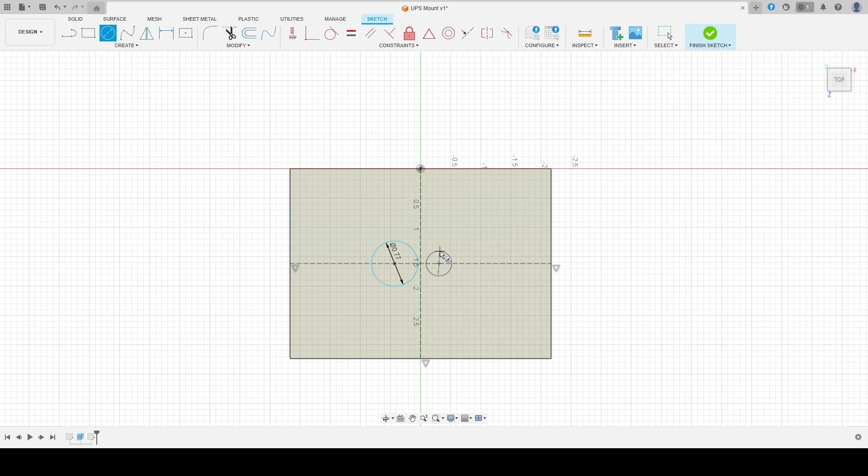So here I am in Fusion 360, starting off with a two-dimensional sketch. What I'm doing is making a 3D representation of the UPS itself, because I want the bracket as tight-fitting as possible while maintaining clearance around the electrical outlets, power button, and cords, which I'm drawing now. The cords I'm not drawing all the way complete as long as they are, I'm just making a quick representation of them.

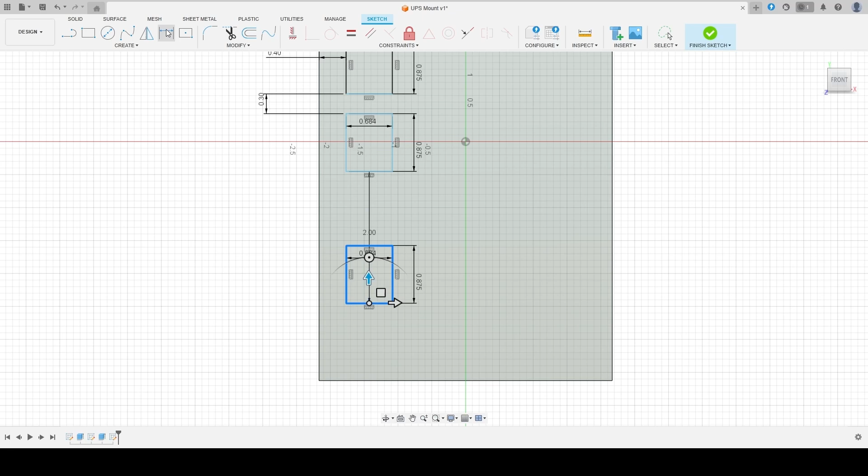Here I'm placing the power button, followed by the outlets themselves. This will make sure my design is as accurate as possible. A few extra minutes up front can go a long way.

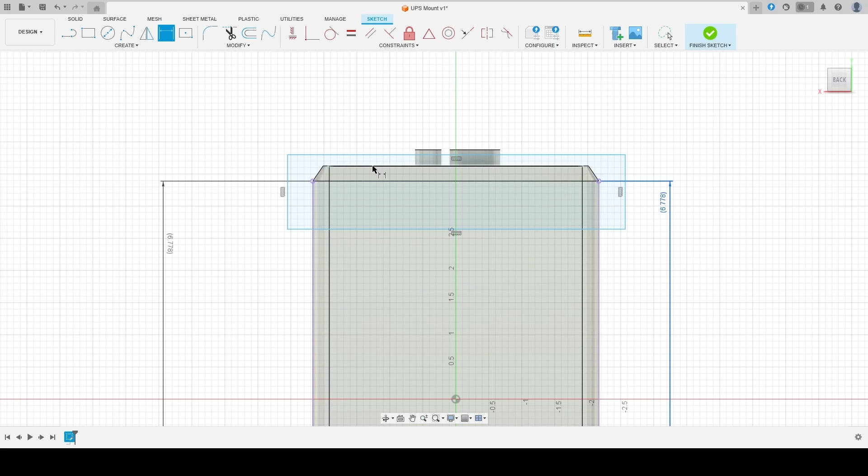Typically when I design anything, the fillets and chamfers are the last things I do. Sometimes they can affect other things inadvertently - if you start taking dimensions off those fillets or chamfers, they can start messing with things. That's why it's the last thing I added.

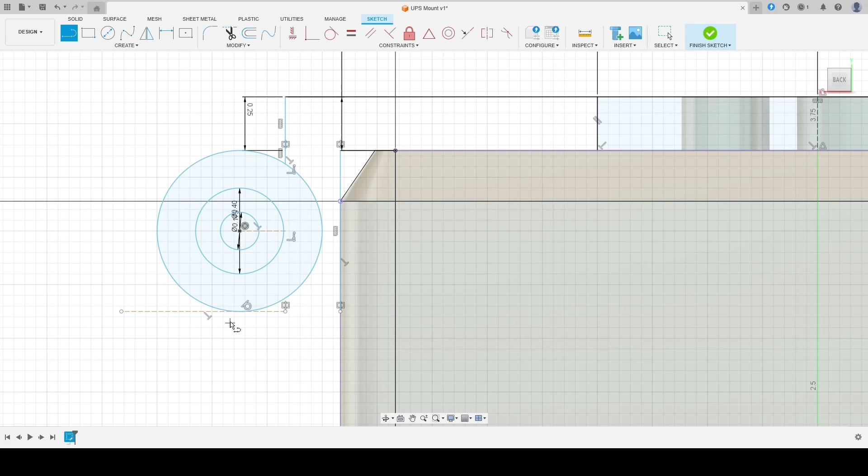Now I'm starting on the actual mount itself that's going to be hung up underneath that shelf. You can see I'm kind of playing around with it, figuring it out as I go. When I design anything, especially a bracket, I pick out my hardware ahead of time, what I plan on using. So I'm using some standard pocket screws for woodworking to mount this thing. I measured those ahead of time so I knew my hole size and how deep my counterbores needed to be.

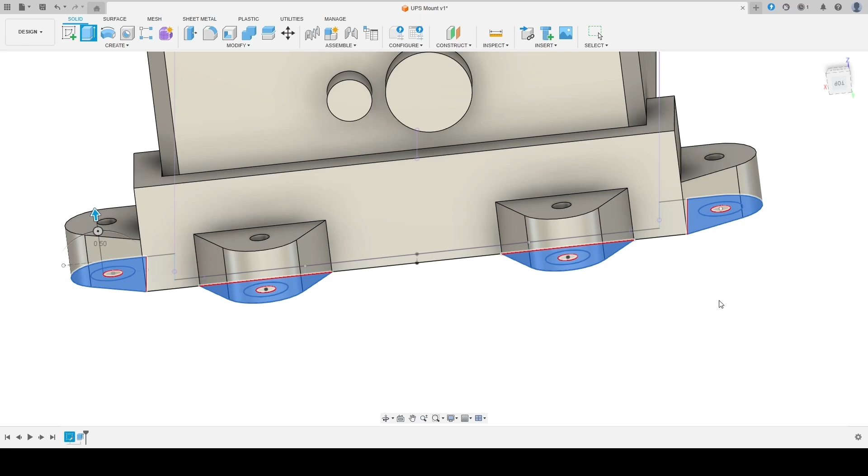The extrusions are where things can get a little complicated if you've never played around in CAD before. Typically you start off with a two-dimensional sketch and then turn it into 3D by extruding it. I try to make the sketch a little more complex in the beginning so I can do extrusions based off the minimal amount of sketches necessary. That keeps things more simple for me.

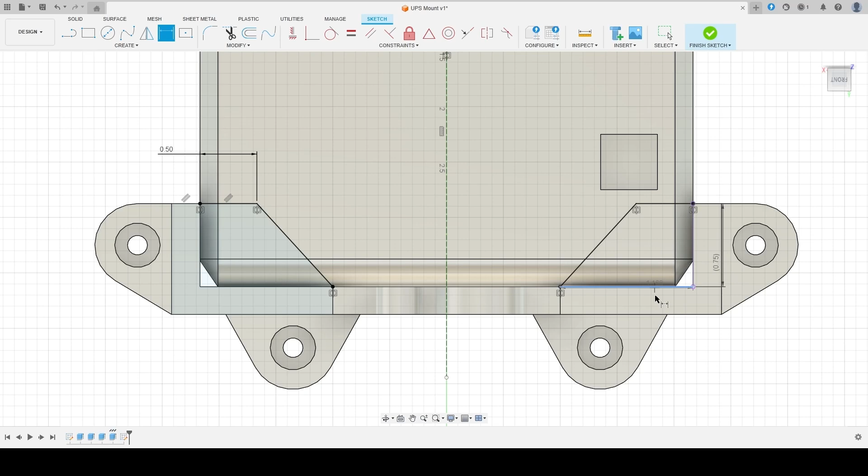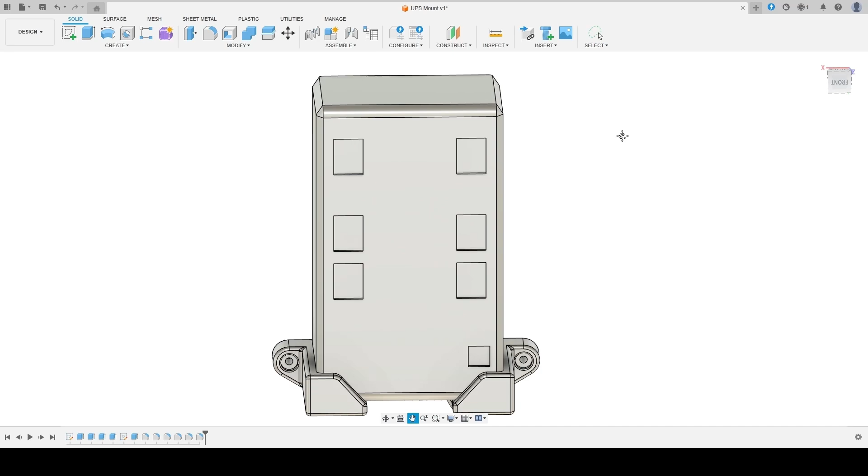I finish this up by closing out the corners and extruding them to encapsulate this box the way I wanted to, with some clearance built in as well. 3D printers are only as accurate as you make them, so I tend to add in some clearance where I can. As I mentioned before, I add all the fillets, chamfers, etc. after the fact, once I'm confident in my design.

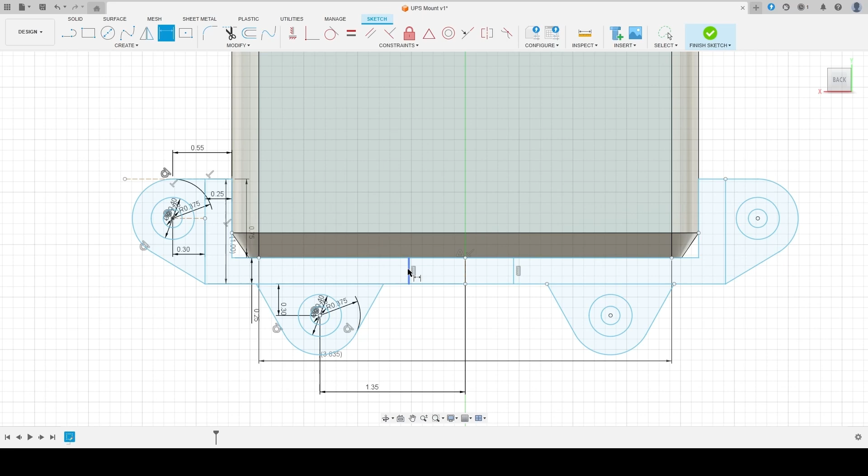Now that one is complete, I can basically copy it and move it to the bottom where I can start making the other bracket. The reason I need two different brackets is because of the layout of the outlets themselves. The bottom side I'm working on now is a little different, but the whole pattern's basically the same, so I just copied it down and repeated the steps of the first one - making one complicated sketch and then doing extrusions based off it.

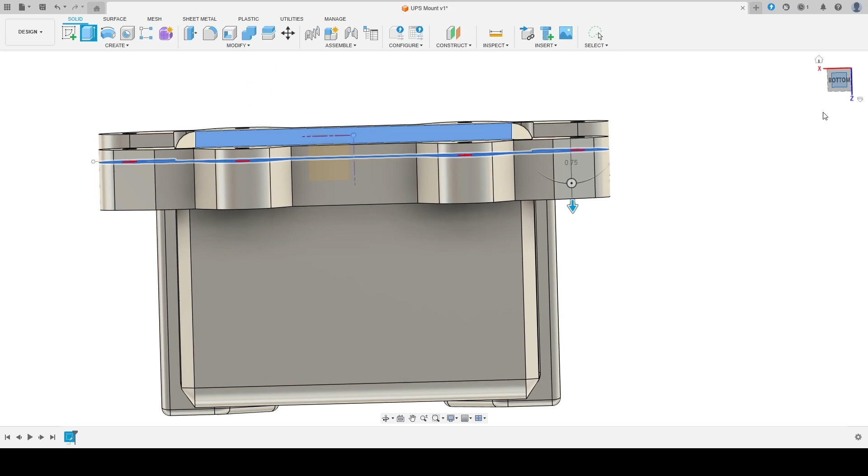So I try to minimize how many sketches I have. It makes it way easier to go back and edit if I find there's a problem later. It's as simple as going back and changing one dimension in the sketch, and it's going to pull all those extrusions in line with it.

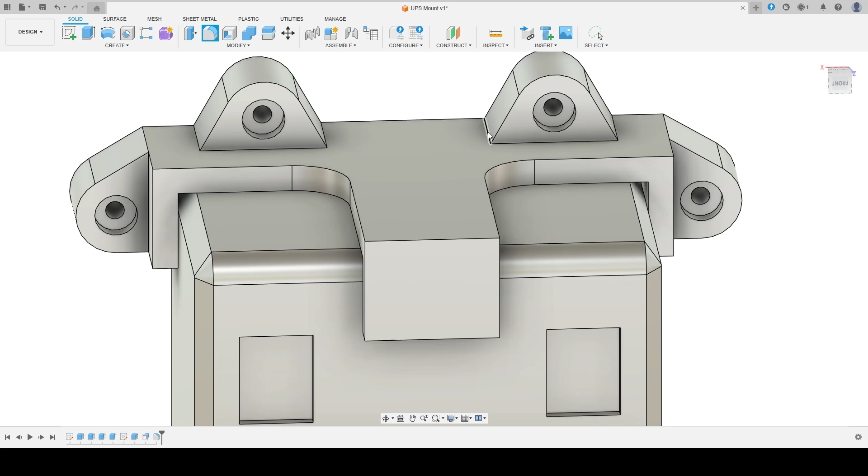You can see I'm pulling up one piece in the middle there, creating a tab that's going to go over the top. That just gives me a little bit more room for all of my outlets. There's 6 outlets on this thing, but most of them are spaced towards the bracket I'm building right now, so I'm giving myself as much room as possible. If I put a larger plug on there that has a built-in power supply on the plug itself, I'd have the room to do that.

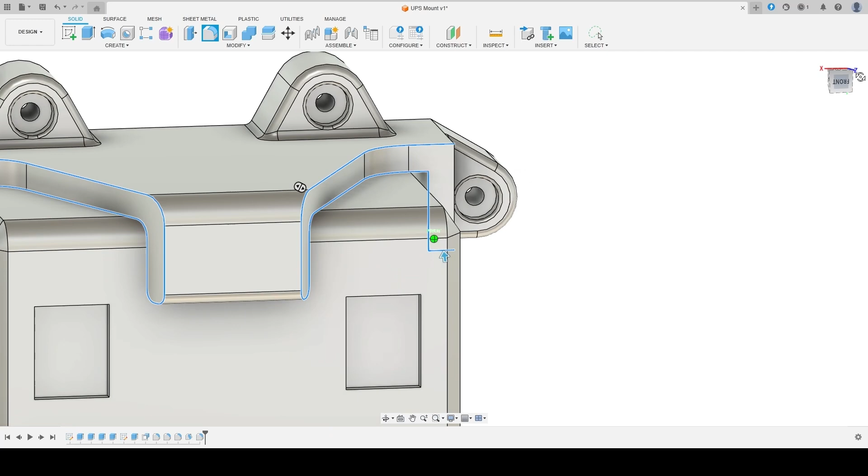You can see I go back and change a lot of things as I'm going. I think of where this thing could potentially fail, and one of them was by not making that tab wide enough. So you can see I drafted it out and put a big angle on there just to stiffen it up.

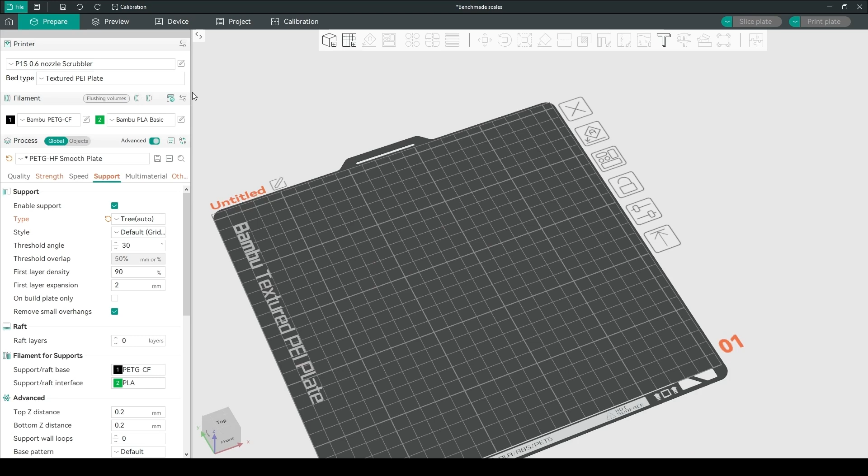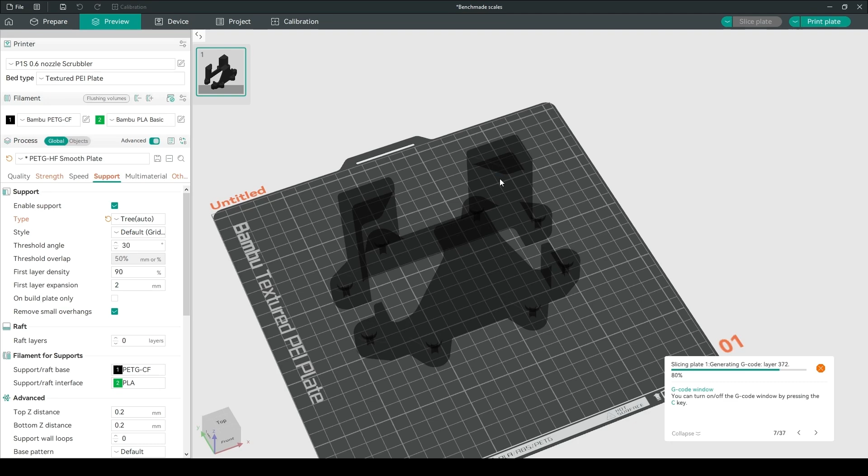It took me right at an hour to design those brackets. After I was done, I pulled it into Orca Slicer. I made the body of the UPS invisible, imported those brackets as a set, and split the bodies apart so they could be moved around on the bed independently. I have this set up to use PETG carbon fiber and PLA as an interface for the supports—you can see that as the green filament right between these two surfaces. That allows me to break away the support material from the actual part really clean, making it easier for post-processing so I don't have a rough surface.

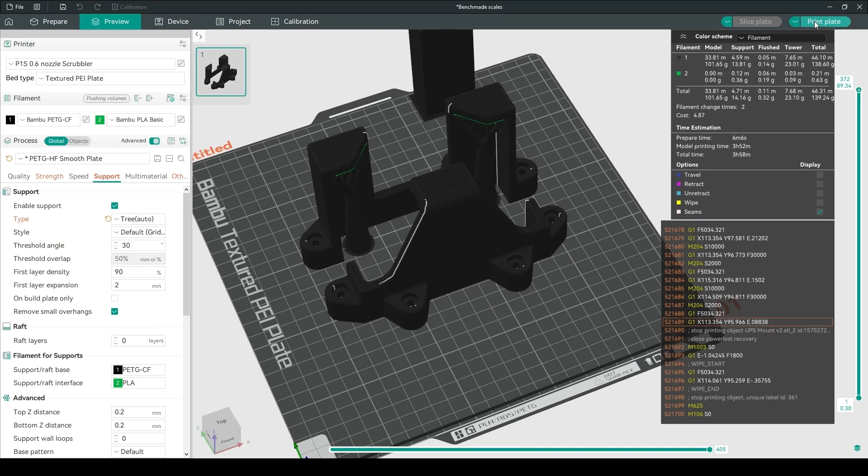This print took right at 4 hours, which really isn't bad. I did it for strength more than anything with the PETG carbon fiber. It's a good material for stuff like this that needs rigidity because it's holding up a decent amount of weight, and I definitely don't want it falling on my little scooter.

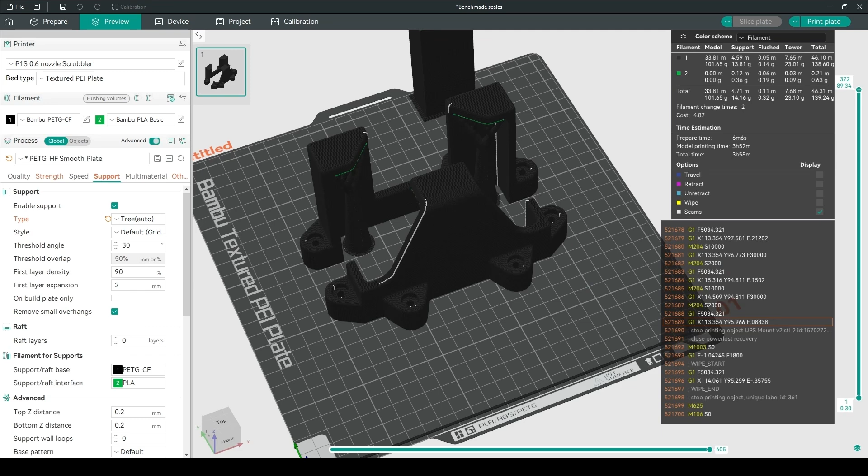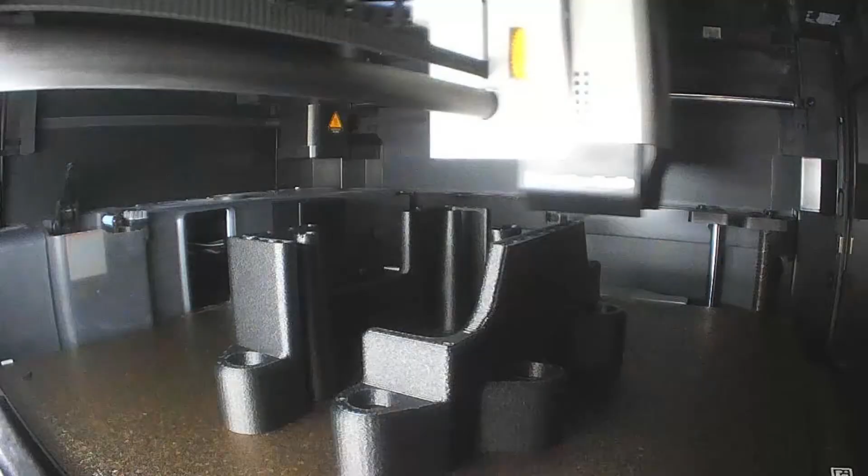Here's a little time lapse of it printing, about 4 hours, and you can see right here is where the interface goes in that's made out of PLA.

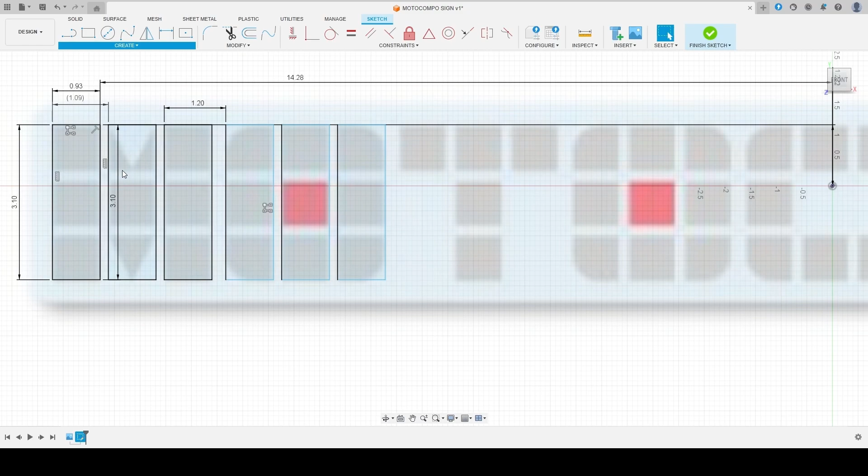I'm starting on the actual sign now that's going to cover up that UPS battery backup system. What I did was download an image off of Google and import it as a canvas in Fusion 360. That allowed me to trace out the letters and get the symmetry right with everything, then scale accordingly to make it the size I want so it'll fit up underneath that countertop.

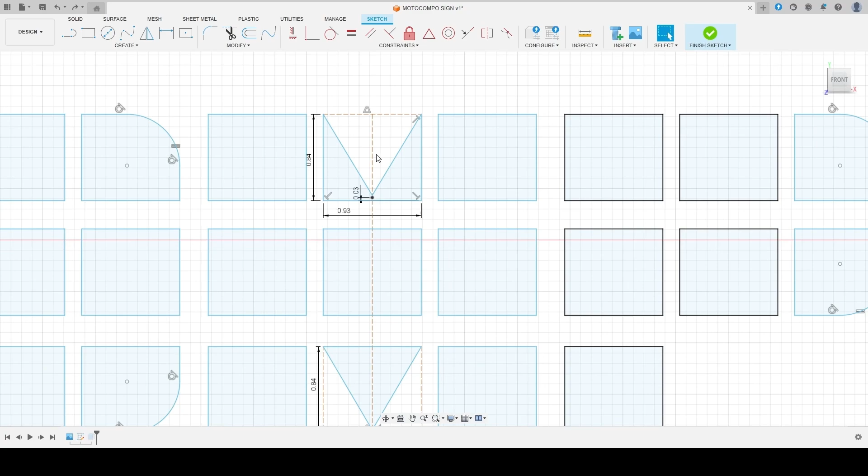After a lot of playing with the size and symmetry between the letters and getting the scaling right, I'm left with some little chunks of letters that I can actually print effectively. Printers don't really like sharp corners, so it took some playing around to get it to where I thought I could print it effectively.

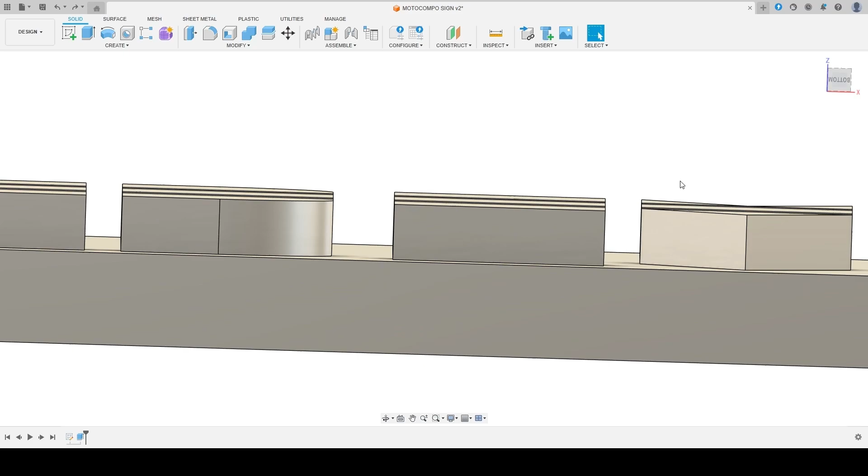After that, I can create the base behind it, and since Moto Compo is 9 letters, I decided to split this base into 3 pieces so it would fit on my printer and keep everything symmetrical. I used some simple planes to cut this body into pieces, then used a subtractive method to emboss the letters so that when I glue them, they stay oriented correctly.

I hope you guys enjoyed the video. I tried to keep it simple and to the point as much as possible. I just wanted to show you kind of what goes on behind the scenes. There's a lot of time spent at the computer, especially for additive manufacturing, where you don't have the luxury of just trimming some material off of something, welding up a little bit here and there, and winging it as you go.